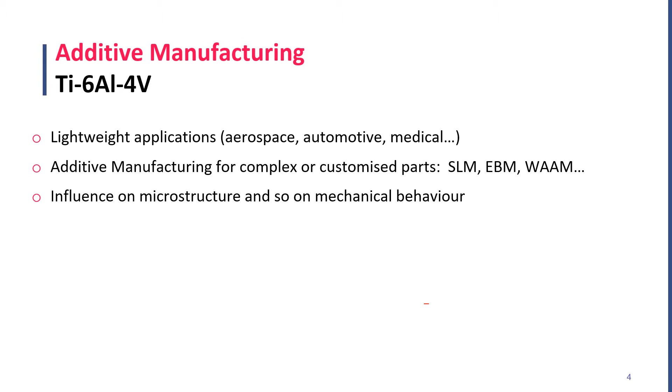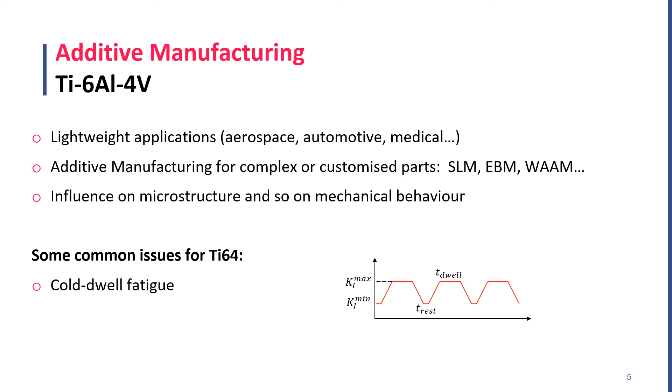Despite the very good properties of titanium-64, creep processes happen even at room temperature. Some failures involving cyclic loading and also sustained loads, as we can see in this loading scheme, have been found, and this is called cold-dwell fatigue.

Here we can see a failure attributed to cold-dwell fatigue of the fan hub that caused the failure of the whole engine of an Airbus aircraft in 2017, requiring an emergency landing.

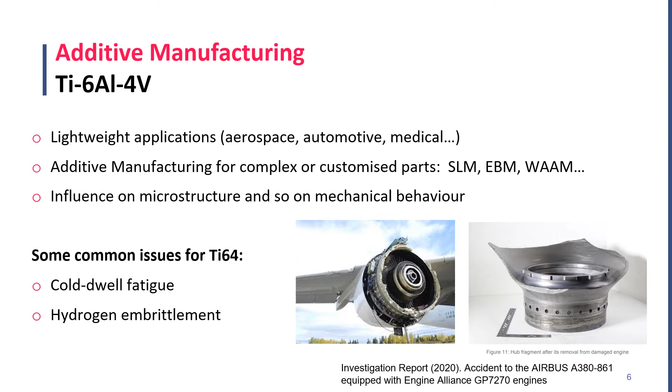Other common process is the failure of titanium alloys due to hydrogen, usually known as hydrogen embrittlement. Some manufacturing processes, such as welding or electroplating, introduce hydrogen, and this can be outgassed in a baking post-processing, but of course this increases the production cost. Hydrogen uptake can also happen in service, especially in electrochemical reactions or when titanium is in contact with gaseous hydrogen.

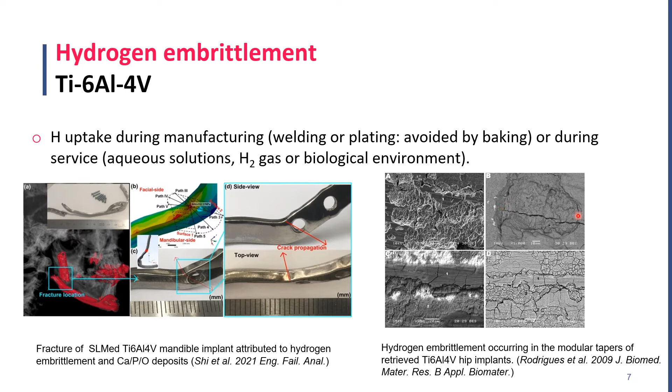As we can see in these two failures, hydrogen embrittlement is also critical in biological environments. Here we see a fracture of a titanium-64 mandible implant attributed to hydrogen embrittlement, and similarly, we see how cracks are nucleating in a hip implant due to hydrogen absorption.

This accelerated cracking when hydrogen is present in titanium alloys is attributed to the formation of hydrides, which is a very brittle phase. In titanium-64, which is an alpha-beta alloy, hydrogen transport and hydride formation is more complex. Alpha phase and alpha prime, which is the martensite usually formed during SLM, are hexagonal close-packed phases and have lower diffusivity and lower terminal solid solubility than the beta phase, which is a body-centered cubic crystal. So the presence of martensite will in principle delay hydrogen diffusion, but increase hydride formation.

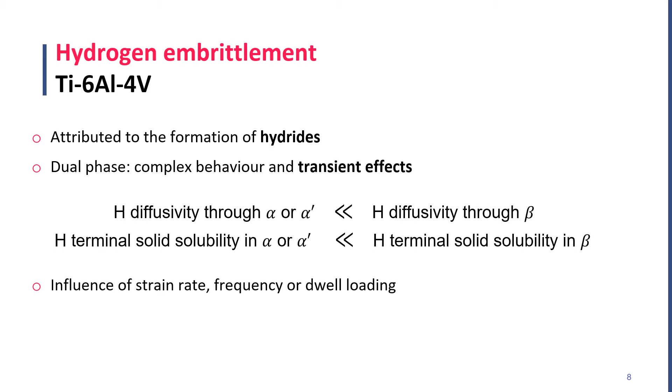We must also take into account that embrittlement is strongly influenced by hydrogen kinetics, especially during cyclic loading, such as the case of cold-dwell fatigue.

Here we can see a nice scheme of how the formation of hydrides takes place and promotes cracking in an alpha-beta alloy. When hydrogen enters, beta phase has a much higher solubility and diffusivity, so hydrogen atoms tend to accumulate in beta grains. However, due to the different strain dilatation and solid solubility, stresses are developed in the interface, leading to the formation of geometrically necessary dislocations and also hydrides. After that, due to the high amount of hydrides and dislocations, cracks nucleate and propagate.

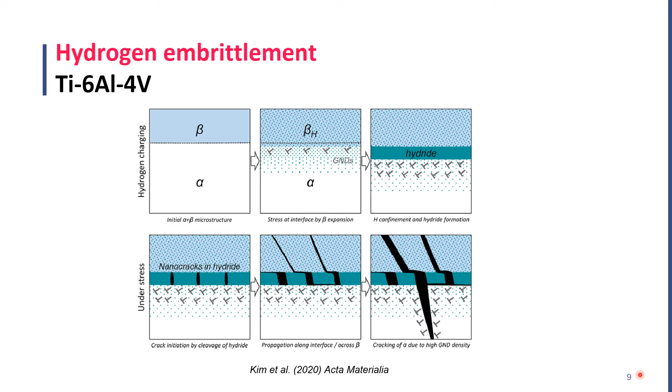As we have already mentioned, SLM produces the formation of martensite, as we can see in this figure. This alpha prime usually takes a lamellar shape, but the shape and the size strongly depends on printing parameters, for example on hatch spacing or on scanning velocity.

This transformation during rapid cooling does not only influence hydrogen diffusion and hydride formation. Martensite is also a harder phase, so higher stresses are going to develop.

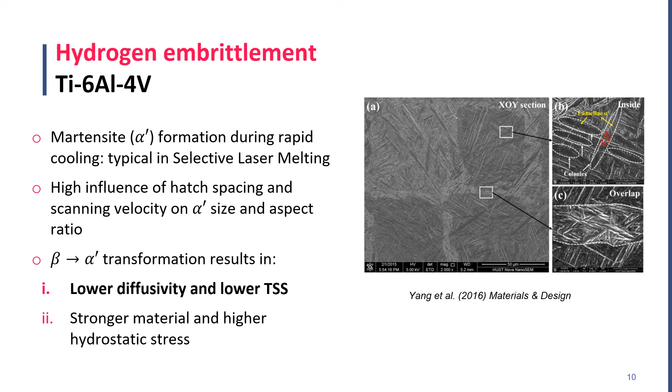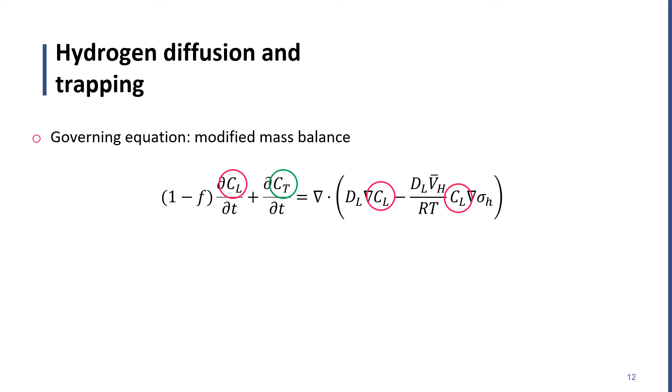This is the equation governing diffusion, and here we can distinguish between hydrogen in lattice sites and trapped hydrogen, or hydrogen in trapping sites. The magnitude F represents the hydride volume fraction, and 1 minus F is added to include the rate of interstitial hydrogen which is forming hydrides.

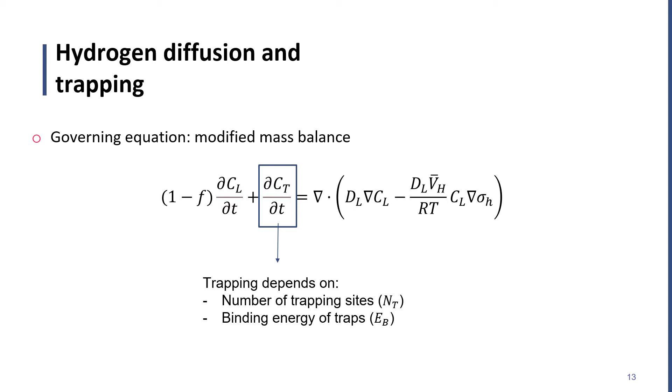The trapping term can be regarded as a sink term, and it depends on the number of trapping sites, but also on the binding energy of those traps. An important term here is included within the flux to reproduce hydrogen accumulation in tensile regions, which is very important for fracture. This term is proportional to the hydrostatic stress gradient.

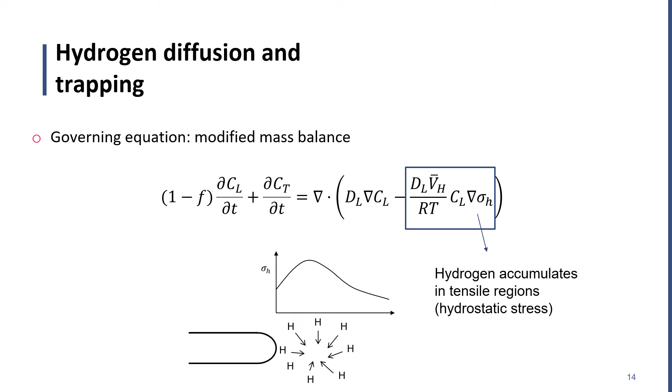Here we are assuming a scalar value for the lattice diffusivity, but to consider anisotropy we could implement, for example, a diffusivity tensor. But here, for simplicity, we are just analyzing two limiting cases: the case where hydrogen diffuses parallel to the faces, which is a much faster situation than the case where hydrogen diffuses perpendicular to the faces.

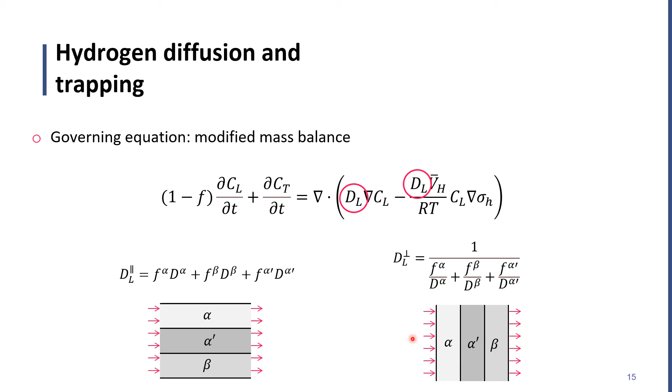Now I'm going to briefly mention two key points for hydride formation modeling. The terminal solid solubility is the concentration at which hydride formation starts, and this value depends on hydrostatic stress. We must notice that this term, for the common parameters, is always negative, so the higher the hydrostatic stress, the lower the terminal solid solubility.

Other important aspect is that a rule of mixtures is considered for the equilibrium solubility. The rate of hydride formation is determined by a simple lever rule until the concentration reaches the limited value for hydrogen atoms. All this framework follows the work of Lufrano, so more details can be found in this reference.

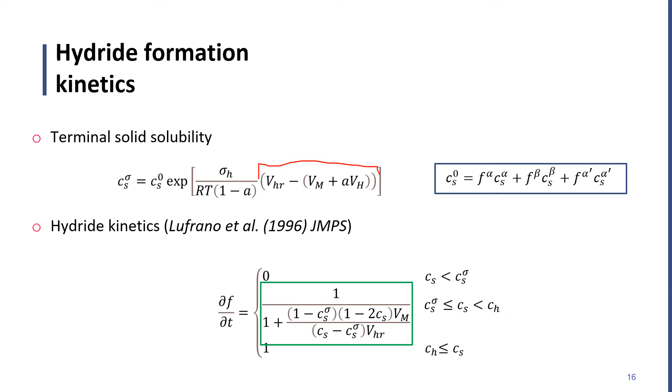The implementation of both hydrogen transport and hydride formation is performed in a user subroutine in Abaqus, and we exploit the analogy with the heat transfer equation, so we use a UMATHT, and the concentration in lattice sites is solved using the temperature degree of freedom.

However, for the hydride volume fraction, we cannot use this degree of freedom, and we just implement a forward Euler scheme. It is important also to note that we will not discuss dilatation and hydrogen modified plasticity, but these are critical phenomena for embrittlement.

We have also implemented the corresponding equations using a user expansion and a user hardening subroutine in Abaqus. So in future research, we are going to also discuss all of these processes.

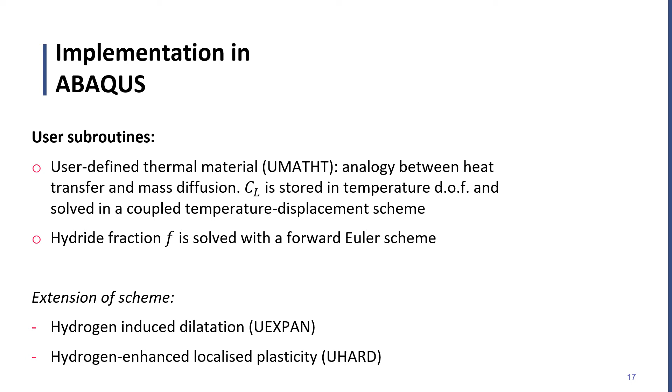To study hydrogen accumulation and hydride formation, we consider the typical boundary layer approach, in which a crack with a small radius is loaded with remote displacements. These displacements are proportional to a stress intensity factor, and they follow the theory of linear elastic fracture mechanics.

We use a user displacement subroutine in Abaqus to make this loading automatic, and we reproduce a cyclic load distribution for the stress intensity factor.

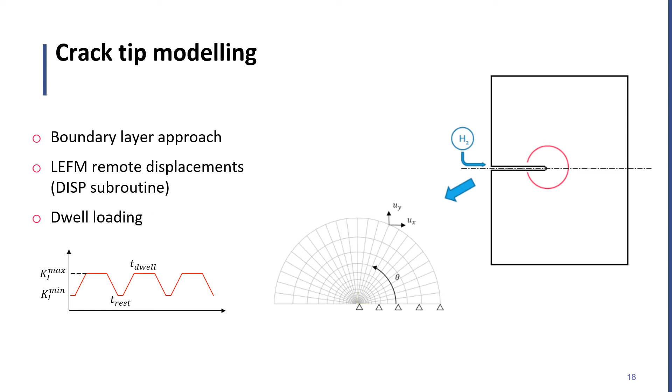We must recall that the context of this study is to predict possible effects of selective laser melting on hydrogen transport and hydride formation. So we have to consider possible modifications in microstructure and so in the parameters.

For example, the building orientation can produce anisotropy. As previously mentioned, we only analyzed two limiting cases.

Another input parameter that will surely be increased by the selective laser melting is the fraction of martensite. We can recall that the alpha prime, the martensite, has a lower diffusivity and also a lower solubility than the beta phase.

We also can predict that distortion in the microstructure due to the rapid cooling will also promote a higher number of traps.

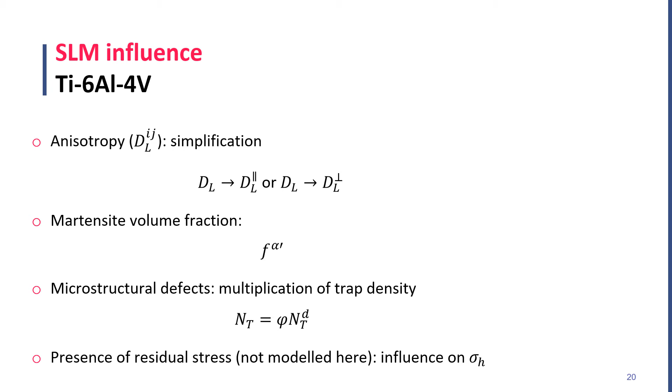Finally, residual stresses are not modeled, but of course would influence the process.

After these considerations, we define four hypothetical materials. Number one assumes parallel diffusion and a low martensite fraction. Material number two assumes the same low martensite content, but a slower diffusion because of the perpendicular phase arrangement.

Number three can be compared with number one because the only difference is the higher martensite fraction. And finally, the material number four has the same parameters as number three, but with 100 times the density of trapping sites.

Here we must say that for number 1, 2, and 3, the number of traps has been related to an intermediate dislocation density for titanium-64.

Here we do not consider different yield stresses for the sake of simplicity, but of course, the higher the martensite content, we should consider a hardening effect in the yield stress.

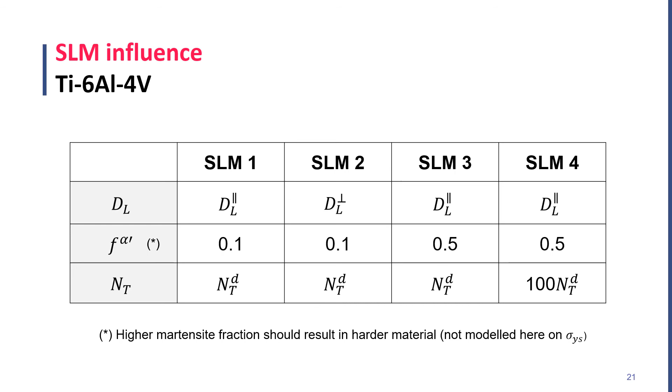However, when hydride starts to form, the formation is faster for a high martensite fraction, as expected, and so the hydrogen concentration increases faster.

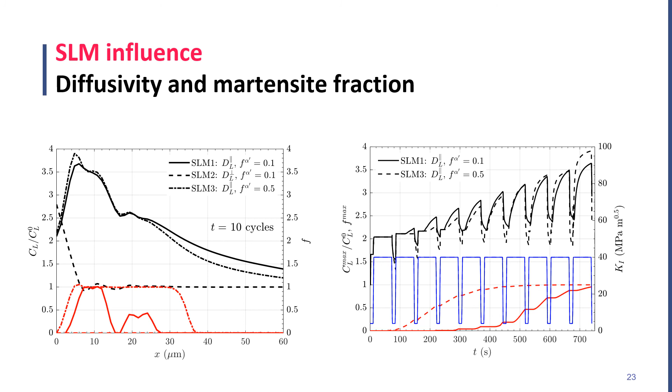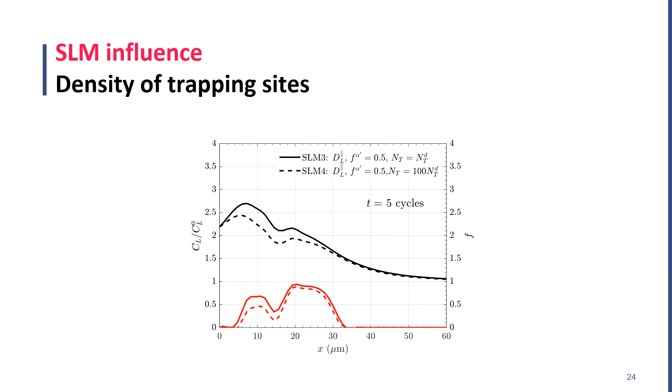To sum up, we recall that the objective of this work is to predict how selective laser melting is expected to modify microstructure, especially the martensite fraction, and this will affect their response to hydrogen environment.

This modeling framework is complex, especially for an alpha-beta titanium alloy, but here we have demonstrated that hydrogen accumulation and hydride formation can be implemented.

For time reasons, we did not discuss strain dilatation or modified plasticity, but we have already implemented this phenomenon in Abaqus subroutines. The following step is to predict crack propagation by coupling our framework with phase field models.

And of course, we are also starting with experimental testing on titanium-64 produced by selective laser melting to verify our model predictions.